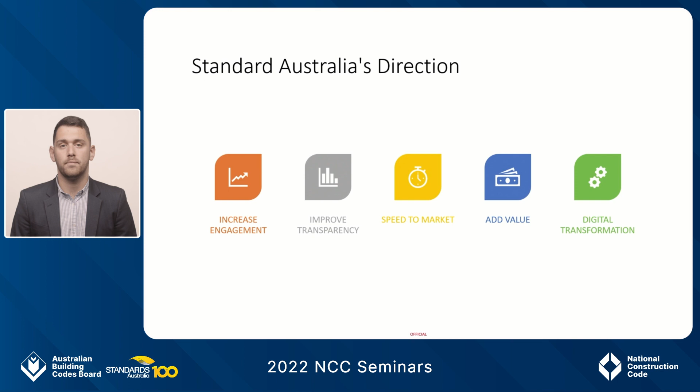We now have a strategic initiatives team and a research team who work to identify and flesh out upcoming opportunities. This will allow us to move quickly on emerging themes and hot topics. The UN sets the goals and we work to align with them. So things such as hydrogen for clean energy, sustainable cities, climate action and so on. We're seeing real appetite for conversation around circular economy, sustainability and resilience.

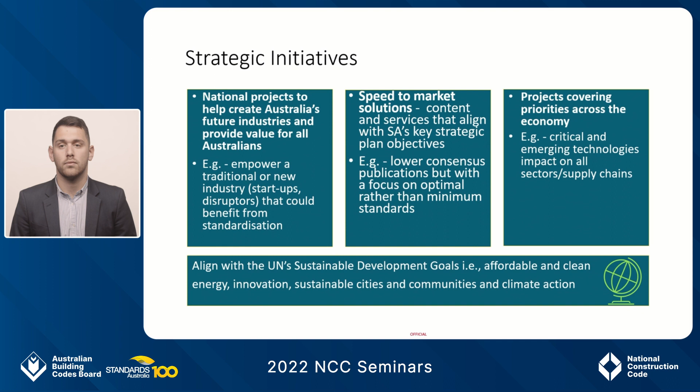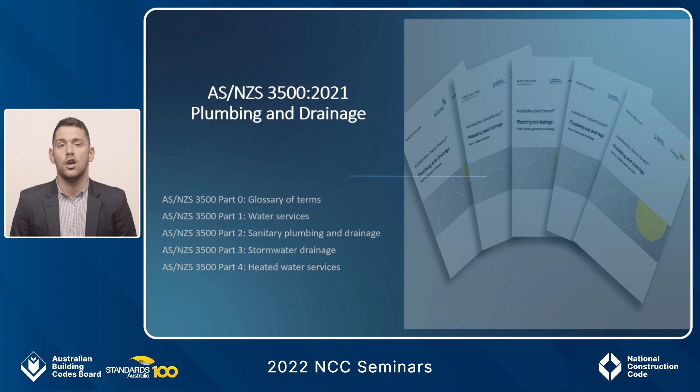So the main part of my presentation, I'll take you through the broad revision to the AS/NZS 3500 series. It's the 2021 edition and all 5 parts, Part 0 through to Part 4, have been revised. So starting with definitions. AS/NZS 3500 Part 0 has not been updated since 2003, and during the 15 years since it was published, the main parts of the series have been updated twice, both in 2015 and then again in 2018. And this has left a number of defined terms being listed within AS/NZS 3500 Parts 1, 2, 3 and 4, not included in Part 0, and this results in misalignment between parts in the series. And this misalignment has the potential to cause confusion through defined terms not being consistent both with the standards and also with the PCA.

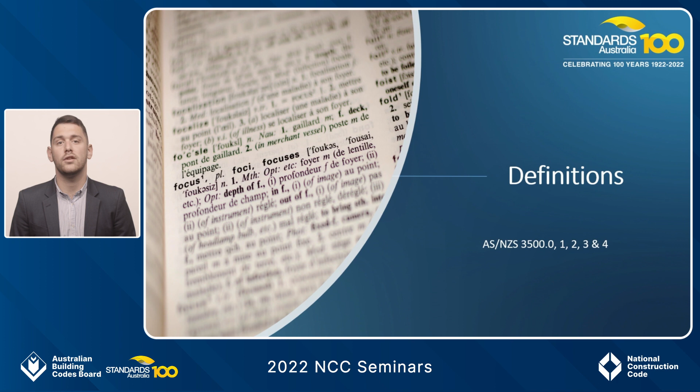So the revision includes defined terms located in AS/NZS 3500 Parts 1, 2, 3 and 4 to be included in Part 0 and then deleted from the main part of the series. Existing definitions in Part 0 were also reviewed to see if they need to be amended in light of new technologies and practices. Also, defined terms in the PCA that are relevant to the 3500 series have been added to Part 0, and defined terms in other standards such as AS/NZS 6400 will also be duplicated to ensure that they are referenced in Part 0 and they do live in the 3500 series, and there is that consistency in the terminology.

So looking at WaterMark alignment. References to product specifications were common throughout AS/NZS 3500 Parts 1, 2 and 4, and there are a few issues with that. The major issue being the fact that the specifications referenced were the edition of the specifications which were current at the time of publication. Now, as a secondary reference, this locked that specific edition of that document in until the primary reference document is updated.

And this was made worse due to the fact that the PCA and the 3500 series both aligned and they were both revised on a 3-year cycle. The other issue is that the specifications referenced in the AS/NZS 3500 series may not be the same specifications deemed appropriate by the WaterMark Administration for the certification of a plumbing or drainage product.

So as an example, the installation standard could reference a document for the authorisation of a product. However, to be certified under the WaterMark certification scheme, the product would be required to be manufactured and certified for compliance to a completely different document not referenced in the 3500 series. So overall, this revision will ensure alignment between the plumbing and drainage installation standards, the requirements of the NCC and the WaterMark certification scheme.

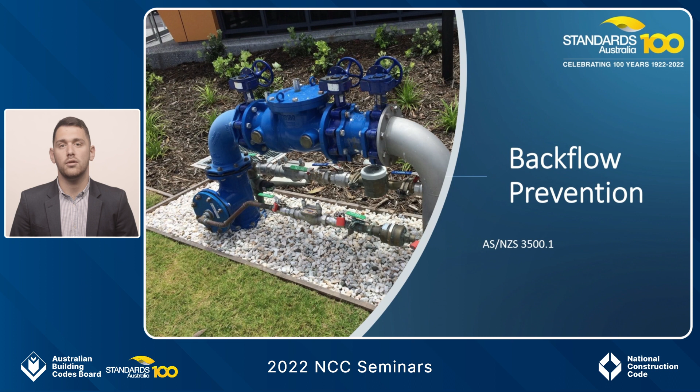Looking at bushfire-prone areas, AS 3959 contains requirements for plumbing, which unfortunately plumbing practitioners were not aware of, as it wasn't referenced in Volume 3, and the appropriate provisions were not contained in the 3500 series. This overall led to a lack of awareness of the plumbing requirements legislated under the BCA via AS 3959. And although this issue was attempted to be resolved through the introduction of informative references in the BCA, the issue remained that plumbers just weren't aware of these additional requirements for plumbing and drainage installation in these bushfire-prone areas.

As construction is continuing to expand outside of major capital and metropolitan areas, this issue is probably going to increase. So the revision of the 3500 series, specifically Parts 1 to 4, will include information for plumbing and drainage in designated bushfire-prone areas, and it'll refer the reader to the NCC for any specific requirements. It'll ensure that the plumbing systems installed in buildings in designated bushfire-prone areas do not create an increased fire risk to the building, such as providing an entry point for flames and embers.

Looking at wet wells. A range of prefabricated wet wells are now available in a variety of modern materials, such as high density polyethylene, polypropylene and PVC. Since the first release of AS/NZS 3500 Part 2 in 1990, there had been no updates to the allowable wet well materials, and the restriction to only allow wet wells from materials such as reinforced concrete, corrosion-resistant metals, brickwork or glass reinforced plastic constrained the use of modern materials, and these required a performance solution. So the revision of 3500 Parts 2 and 3 will increase the range of materials that can be used to construct wet wells.

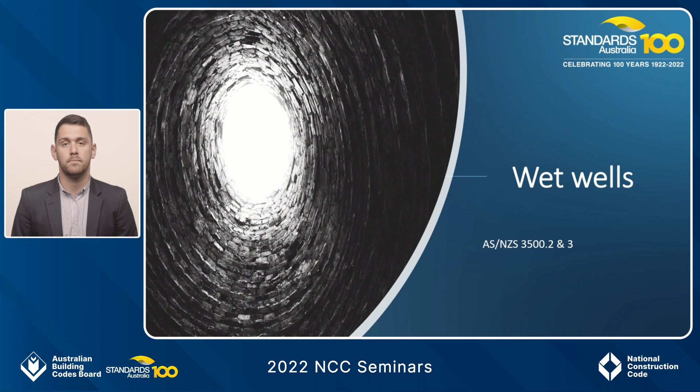AS-NZS 3500 Part 2 was revised to include requirements for drains in unstable soils. The 3500 Part 2 2018 edition and the NCC in 2019 did not previously reference any requirements or provide any guidance on the construction requirements of drainage systems laid in unstable soils.

So an informative appendix will be included in 3500 Part 2, and this will provide guidance on the minimum standards that should be applied when laying drains in unstable soils. The committee actually considered mandatory requirements, but they came down on making them informative, so as to give regulators the option of enforcement as and when they are required.

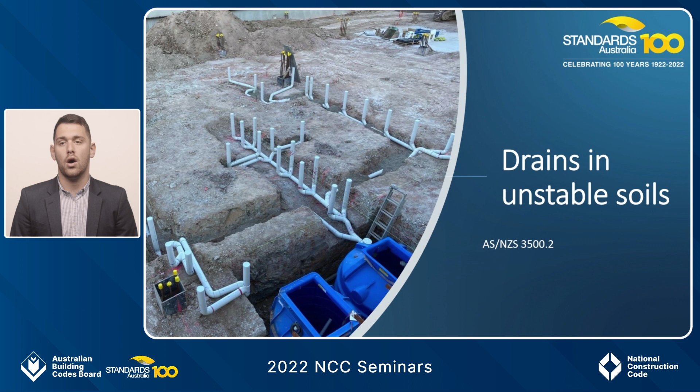This project was to amend sections 6.10 and 6.11 in AS-NZS 3500 Part 2. The revision was done to enable the standard to reflect common industry installation practices, which will provide for improved levels of safe ventilation performance from AAVs and pressure attenuators within plumbing and drainage systems in buildings.

The existing technical installation requirements that were previously contained in Part 2 did not reflect current industry knowledge and installation practices, as the performance of both of these products has been evolving over time.

In regards to the air admittance valve, section 6.10 of 3500 Part 2, the changes are fairly minor, and they're aimed at reducing any chance of a non-compliant installation practice.

Section 6.11, pressure attenuators, is a bigger change, and this supports the critical partnership required from the commercial plumbing contractors and the professional engineering designers who are responsible for the final designs required to service commercial multi-storey developments. Overall, the changes will enable a more flexible and efficient application for the installation of the products.

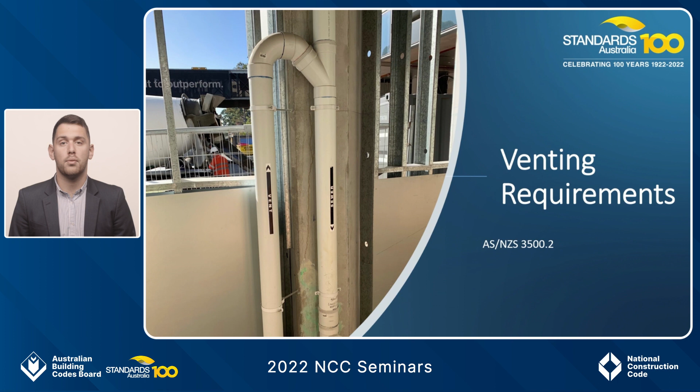3500 Parts 1 and 4 were revised to include consistent requirements for penetration in steel frame construction. The objective was to bring requirements for holes in steel framing into line with the BCA and the BCA's referenced NASH steel framing codes, which specify the provision of service holes in metal framework, including the size, number and placement of holes.

AS-NZS 3500 Parts 1 and 4 and the PCA did not refer to these standards, and Parts 1 and 4 actually prescribe a completely different set of requirements. This caused confusion in industry when two sets of requirements applied to a building.

The revisions will ensure consistency between the BCA, the PCA, and now the 3500 series, and this will remove the risk of misinterpretation for plumbers.

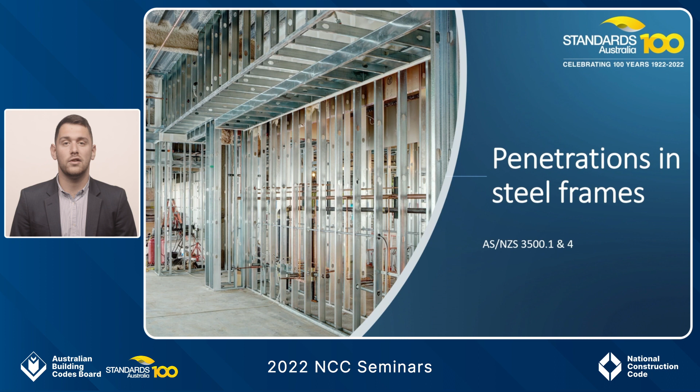AS-NZS 3500 Part 1 was revised, and the requirements for jointing of plastic pipes was reviewed. The revision will direct plumbers to the relevant installation standards for the jointing of PVC, ABS and PE piping.

There were a number of common jointing methods that were not previously mentioned, and this led to calls from plumbing industry for additional methods such as the electrofusion jointing of polyethylene pipes and ensuring that the fittings and pipe combinations are appropriately matched so that they don't result in leaks.

Another amendment to 3500 Part 1 involved the removal of all requirements to comply with a product standard. The ABCB advised that all products used in plumbing and drainage systems, with the exception of stormwater, must be watermarked.

Now, there are three installation Australian standards for plastic pipes. They are AS-NZS 2033 for polyethylene, and AS-NZS 2032 for PVC. Both of these are referenced in the 3500 series.

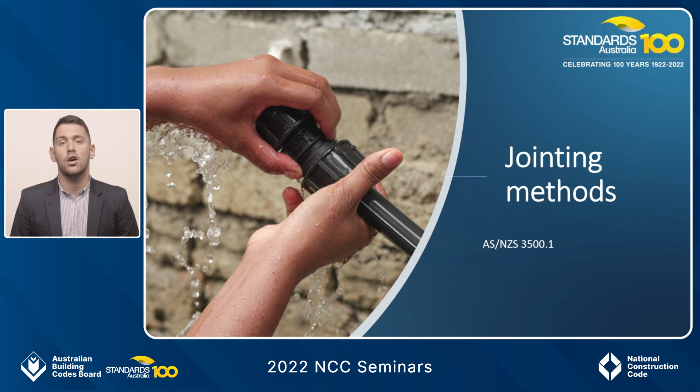AS-NZS 3690 for ABS was not referenced in the 3500 series, even though the product standard, AS-NZS 3518, is currently referenced. So to provide coverage for all appropriate jointing methods, all three installation standards are now referenced in the 3500 series, and the proposed changes to the standard should reflect what is actually occurring in practice.

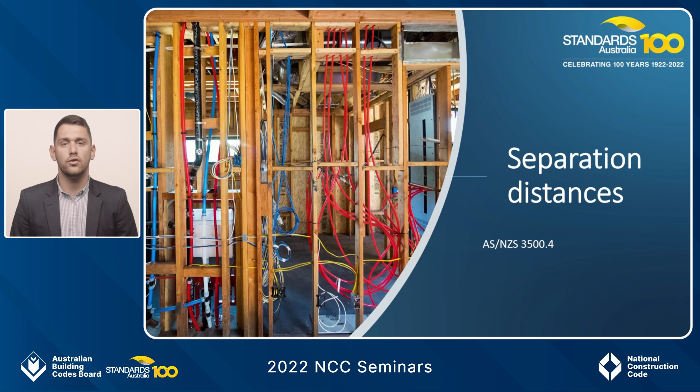Looking at separation distances, AS-NZS 3000, otherwise known as the wiring rules, states that the wiring systems shall maintain a separation distance of not less than 25 millimetres between any above ground gas or water piping.

This minimum separation distance is consistent with 3500 Part 1, but not 3500 Part 4, as Part 4 specifies a minimum separation distance of 100 millimetres between electrical services and heated water pipes.

So a problem arises when an electrician installs wiring within 25 to 100 millimetres of a heated water pipe after a plumber has completed the heated water service installation. Plumbers are then directly impacted in the relocation of pipework, which often costs both time and materials.

So the revision of 3500 Part 4 will align the requirements for separation distances between above ground heated water pipes and electrical services, both with the wiring rules, and it'll also be consistent with 3500 Part 1.

Looking at pipework marking, the revision of AS NZS 3500 Parts 1, 2, 3 and 4 will include marking of pipes. This was an outcome following public consultation on the drafts of the 3500 series, where it was identified that there would be merit in reviewing the marking requirements for commercial pipework. The revision will ensure that the 3500 series provides clear and consistent requirements for commercial pipework labelling to minimise the risk of pipework misidentification.

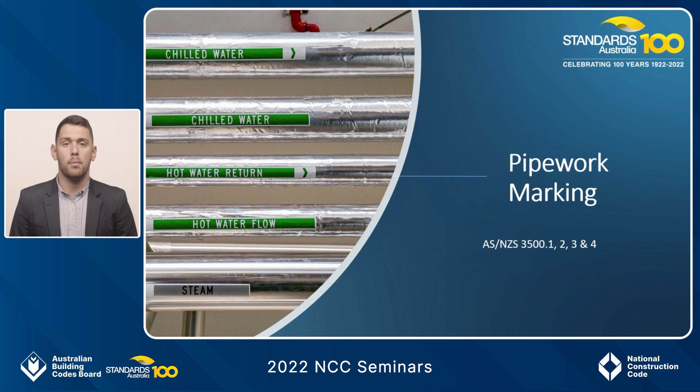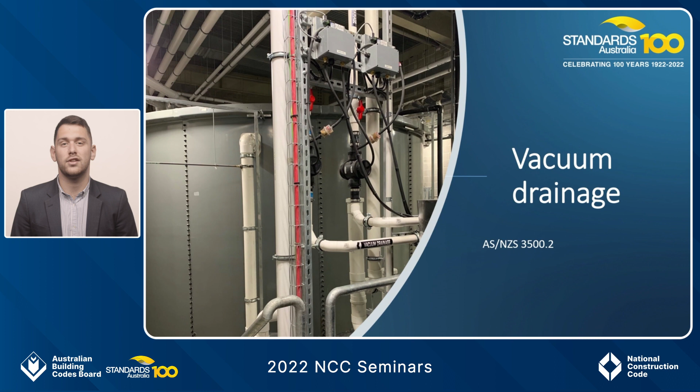Looking at vacuum drainage, as part of the revision to 3500 Part 2, there were minor amendments to Section 16, Vacuum Drainage and Installation. Section 16 is relatively new, first introduced in the 2018 edition of 3500 Part 2, and there were unfortunately several small errors included in the final text. This project simply corrected those errors, and most are editorial or involve clarification of some of the informative text in the section.

AS NZS 3500 Part 2 was revised, including amendments to the requirements for commercial dishwasher discharge, particularly to remove the restriction on only connecting commercial dishwashers to a disconnector gully. As a deemed to satisfy solution, Appendix B of 3500 Part 2 allowed commercial dishwashers to connect to a disconnector gully with a 10-metre discharge pipe. However, this was illogical, as dishwashers are frequently installed in complex locations and have no way of getting to a disconnector gully within 10 metres, since other equipment in commercial kitchens isn't constrained in these ways.

Such as commercial kitchen sinks. Appendix B was modified to allow dishwashers to connect to different drains, not just a disconnector gully, while specifying the pipe size and length of each type of connection. Clause 13.25.3 was also changed by deleting the requirements to only connect to a fixture trap and waste pipe, and simply refer to Appendix B. The maximum number of commercial dishwashers connected to a single drain is then limited to 4 as per Clause 9.4.2.

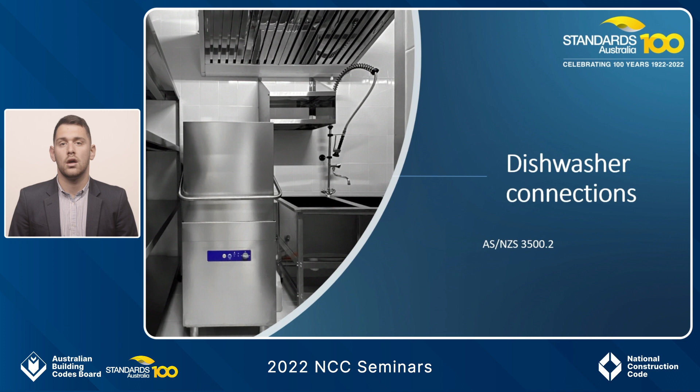3500 Part 3 was reviewed to update the rainfall intensity data provided for both Australia and New Zealand based on 2016 data. Rainfall intensity data is used in AS NZS 3500 Part 3 to accurately design roof drainage and stormwater drainage systems. The data is continually updated through relevant government agencies such as the Bureau of Meteorology. And as the 3500 series is only revised every 3 years, this leads to systems designed based on outdated data, which makes it difficult for designers to determine the deemed to satisfy information and whether it is appropriate.

There was a change of terminology used by the Bureau of Meteorology, and this project sought to align the terminology with the Bureau of Meteorology. Terms include annual exceedance probability, the probability that a given rainfall total accumulated over a given duration will be exceeded in any one year. Also included is average recurrence interval, which is the average or expected value of the periods between exceedances of a given rainfall total accumulated over a given duration. These are the terms now aligned with the recent terms that the Bureau of Meteorology have published.

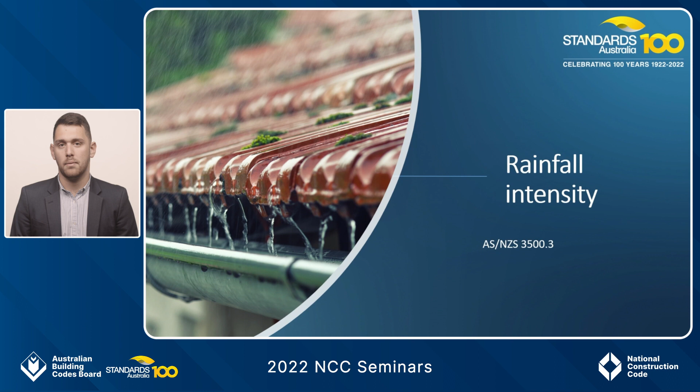The revision to 3500 Part 4 will include requirements for the metered delivery of heated water from centrally generated and circulated heated water systems to individual dwellings in multi-dwelling buildings. 3500 Part 4 did not contain requirements for branches of centralised heated water systems in multi-dwelling buildings, and this resulted in unnecessary loss of water and energy. This corresponds to the objectives of the PCA relating to the supply of heated water. The revision will provide minimum requirements for compliance with the PCA, BP 2.5, Legionella control, and BP 2.6, energy use. Specifically, it will include requirements for branch layout and measurement restrictions from the centralised heating system to outlet points.

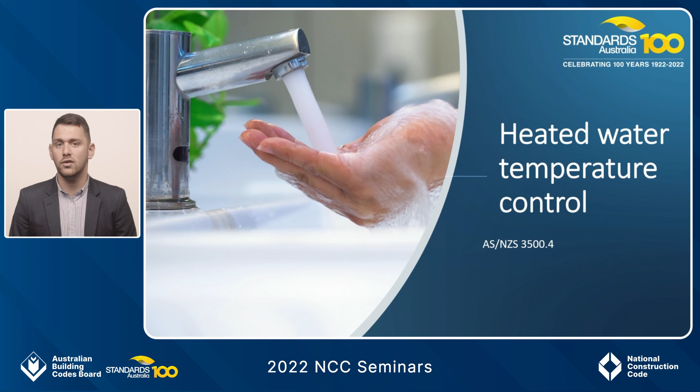Sticking with 3500 Part 4, the revision also sought to amend the requirements for heated water temperature control. Duplicated requirements between the PCA and 3500 Part 4 were removed. In the 2019 edition of the PCA, heated water temperature control provisions, considered matters of public policy, were elevated from 3500 Part 4 and put into the PCA, Part B2, heated water system. NCC primary references mean 3500 Part 4 should not duplicate the NCC. This project will remove any potential confusion for plumbers and point them in the direction of the NCC.

Looking at drains at grade. The revision of AS/NZS 3500 Part 2 involved amending the requirements for connecting drains installed at grade, as sanitary plumbing and drainage blockages were regularly occurring. Research was undertaken, a domestic installation was replicated, with water efficient fixtures utilised, compliant with the PCA and AS/NZS 3500 Part 2.

The installation included a toilet installed upstream of 4 other fixtures connected to a drain using 45-degree junctions installed on grade. Test results showed the full flush discharge performance was negatively affected by each 45-degree junction. During a full flush discharge, water was found to travel up each of the 4 branch lines, significantly reducing the flush volume carrying the waste test media, stranding solids and paper. Stranding was also observed within the 45-degree junction caused by the redirection of flow.

A number of alternative 45-degree junction configurations were tested to find a solution, including installing the 45-degree junction at a minimum of 15 degrees incline when connecting a main drain to a branch drain. This configuration was evaluated through physical testing, and observations found it provided the best performance of all alternatives tested. A proposal was submitted to Standards Australia in 2018, suggesting amendments to show a 15-degree incline when a branch drain is joined to another drain.

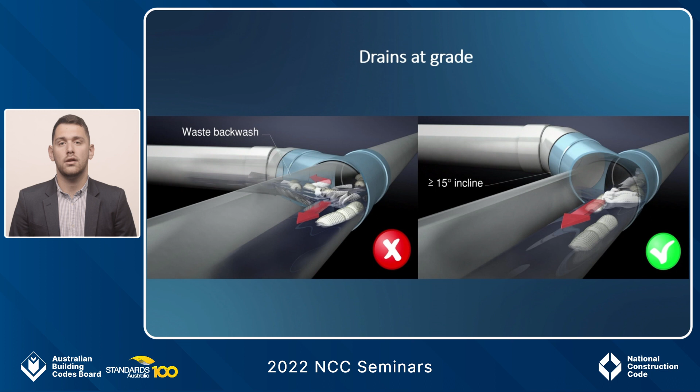While this change was made in 2018, corresponding text had not been updated, which caused confusion in industry, where drains were still being laid at grade without the 15-degree incline of the junction. A minor amendment corrected this. In this slide you can see two images of a main drain to branch drain connection: the image on the left has the connection at grade, whilst the image on the right includes the 15-degree incline.

Moving away from the 3500 series, I'll look at the recent revision to AS 2419, which specifies requirements for the design, installation, commissioning and testing of fire hydrant installations. The purpose of this work was to ensure that the requirements relating to fire hydrant installations are contemporary and reflect present and future risks within the built environment.

As well as acknowledging the benefits of these systems, it introduces a range of requirements for high-rise buildings based on internationally applied standards. It limits the scope to buildings having an effective height up to 135 metres, to Class 7B or Class 8 buildings having a total volume of no more than 108,000 cubic metres, and to buildings that do not include automatic racked storage systems.

Buildings over 135 metres present additional challenges to attending fire brigades, which has implications on the design of on-site fire hydrants. Appendix D contains information around buildings over 135 metres, but the Standards Committee wished to defer prescribing prescriptive solutions until it is better identified and understood how international standards will treat these risks.

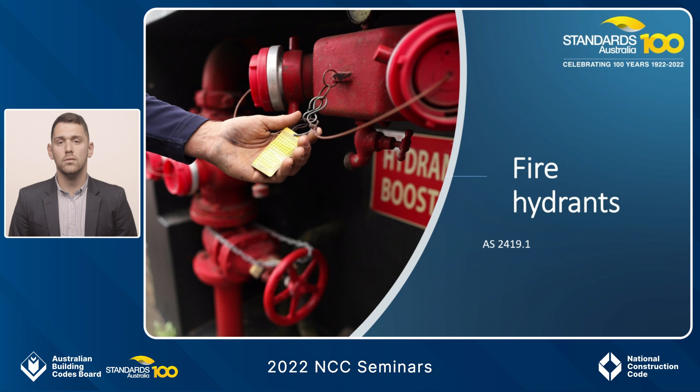Believe it or not, despite this presentation being for the NCC 2022, Standards Australia has actually shifted its attention to 2025 and ensuring that the AS/NZS 3500 series can remain relevant and fit for purpose going forward. In the following slides, I'll present general themes of proposals that Standards Australia have received ahead of the next edition of the NCC in 2025. But bear in mind things are quite rudimentary, as we've only just started looking at this work.

Things that will be looked at in a future review of AS/NZS 3500 Part 1 include flow rate and velocity, guidance for the installation of polyethylene pipes, grey water services, flexible hose installation requirements, provisions for emergency eye wash and shower equipment, water service isolation, rainwater tank installation, and installation considerations for cold water pumps.

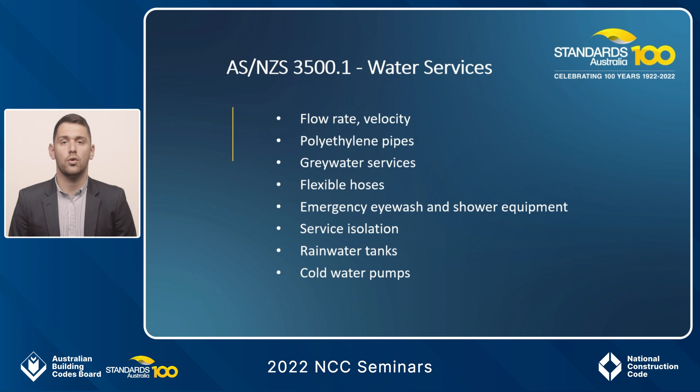Things that will be looked at in a future review of AS/NZS 3500 Part 2 include installation considerations for waterless urinals, the use of eccentric taper fittings on all types of installations, clarification of the requirements of overflow relief gullies in developments with multiple buildings on one site, installation of above-ground pipework and connection of fixtures using drainage principles, provision of installation of bath wastes, and review of provisions for sanitary waste pumps.

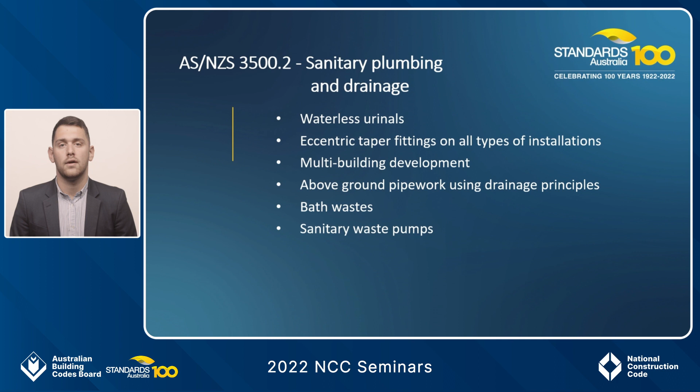Things that will be looked at in a future review of 3500 Part 3 include, in addition to typographical and editorial errors, revisions to requirements for eaves gutters, installation requirements for charged stormwater lines, and installation considerations for rainwater tanks and rainwater pumps.

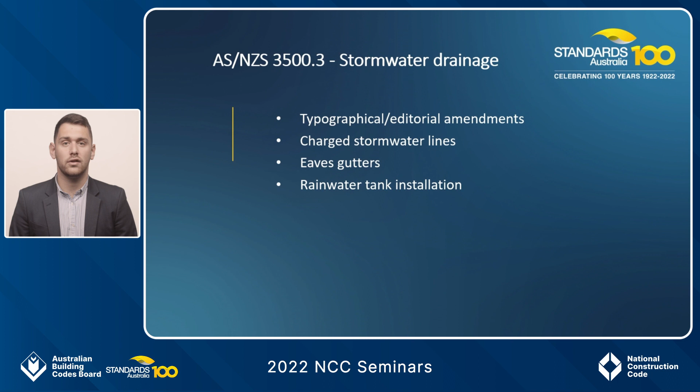Things that will be looked at in a future review of 3500 Part 4, again in addition to typographical and editorial amendments, include the issue of flow rate and velocity, thermostatic mixing valves, and heated water pumps.

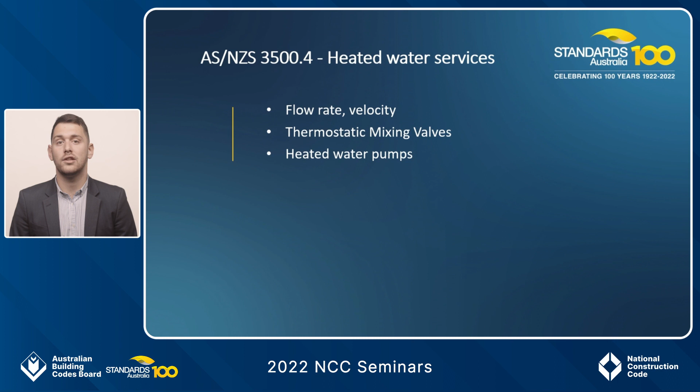As I mentioned, all bullet points are quite vague at this stage, and the work is still at quite a rudimentary level. But we definitely encourage you to review all draft standards when they eventually come out for public comment. I'm sure Standards Australia and the ABCB will both advertise the public comment period for the 3500 series. And I'll be going through our new public comment management system, which will make it much easier for you, for industry, to actually make comments on these draft standards going forward.

So we have a number of ways you can be involved. We're a member-based organisation, and our work program is set by you. It's set by industry. It's not set by me. Anyone can submit a proposal to us if there is a need for a new standard or revision, and assuming there's a net benefit to the Australian community and that it gets broad industry support, we then run it as a project with a project manager under a formal technical committee, which is responsible for the content.

Now, technical committees usually comprise peak bodies or member-based associations, but under the technical committees we have informal working groups which are made up of subject matter experts who are not necessarily aligned with a nominating organisation, but they're actually brought on to help create the content. So if you can't align yourself to any of these peak bodies or member associations, it doesn't mean you can't participate. We definitely encourage you to participate in working groups. We also encourage everyone to review draft standards on our portal and submit public comments. We have a new proposal system which should make life easier, and I'll go through the changes now.

So we have tried to make it easier for you to submit a proposal. Earlier this year, we released an online proposal portal platform which can be accessed via our website. If you're a new user, you will need to create an account, but it's hoped that this new platform will improve our standards development and consultation process. During this trial and transition period, and it is still quite early days, the Microsoft Word proposal forms, which I'm sure some of you have read and reviewed, will remain available for use, and these can also be found on our website.

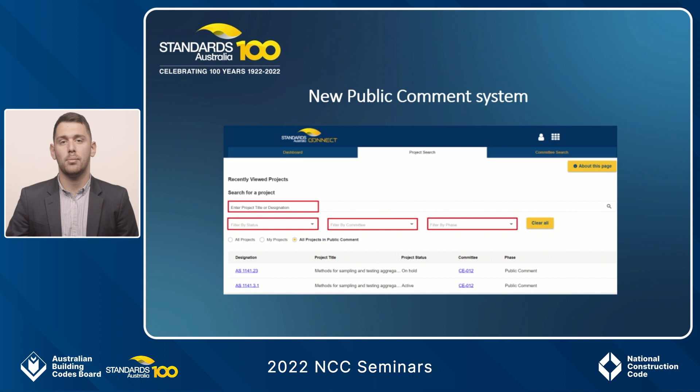Now, there are many great features on this new system, and this includes the ability to view the draft online, the ability to download the draft so you can read it in your own time, the ability to upload bulk comments when you have several comments, and also the ability to endorse or report current comments so that you're not doubling up. You can just give it a thumbs up or thumbs down.